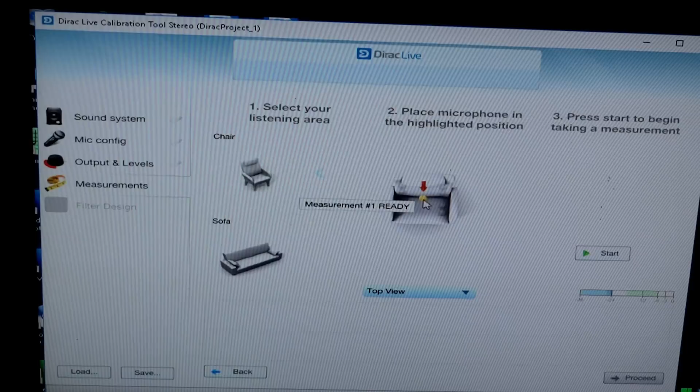So basically it's giving you like a measurement area around the chair, and the instructions say don't put all the measurements too tightly together, because Dirac Live will then filter too much. You want to give yourself a nice area. Now you don't just pick the area, obviously it tells you the measurement points, and you put the microphone basically where it tells you, and it's worth cross-referencing and making sure you take your time and do that bit correctly. There's no time limit. You literally get yourself ready and off you go.

So the first one I think is the most important. You need to make sure the first one is spot on in terms of being in the middle of the seat, being at the right distance, the right height, ear height as well. So if we quickly put that back to that view, it's right slap bang in the middle of the listening position. So that's what I've pre-done. I'm just going to check that, because best to check twice. It's normally measure twice, cut once, but for this it's check twice, measure once.

Okay then, so we're just about to run our first measurement, so be quiet, hold, make no noise. Okay then, first measurement taken, let's quickly check. So this measurement's going to be back against the chair, to the right hand side of the listening position. So I'm going to move over, move the microphone and run the next measurement.

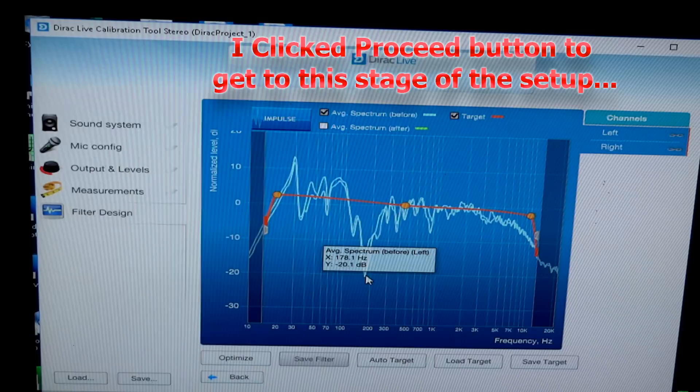Okay, so we've run our 9 measurements. Now this is my horrific in-room frequency response. And if you look at that, it's horrific. Look, it's minus 20 decibels there at 200 hertz, and plus 13 decibels there at 30 hertz. So we've actually got a 30 decibel difference in the bass in this room where I sit.

Now it's absolutely horrendous. However, if you look through the mid-range and treble, the treble tapers off early. That's a little bit of how I've got the speakers toed out. It's a kind of negative side effect of that, but it's very, very smooth. Mid-range and treble is extremely smooth. Now this is actually the magic of Dirac and what Dirac does.

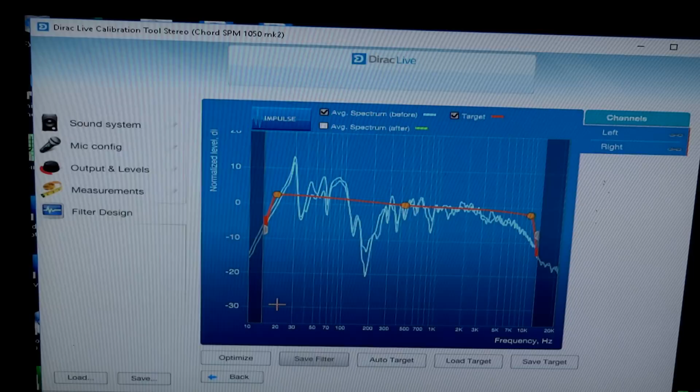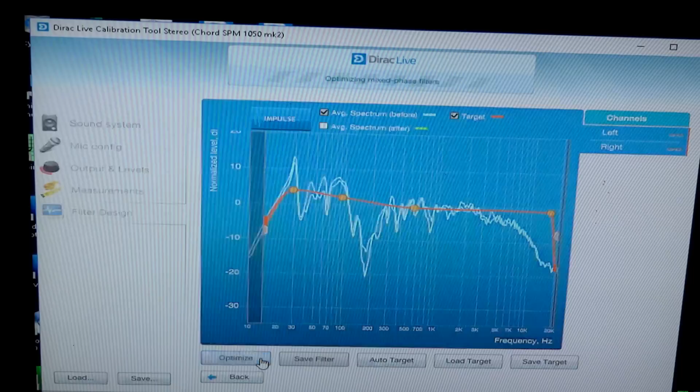So the first thing we want to do is save our measurements. As you can see, these are products that I've reviewed before: Luxman M700, Arcam P49. So I'm going to save this as SPM 1050 Mark II. So that's our measurements saved. So this is my pre-saved target curve. Now this is the magic of Dirac. Watch what it does. So hit optimize.

Boom. Fixed. Now obviously it can't fix the massive null that I've got here. However, it reduced it from minus 20 to minus 10 decibels. It gives you some idea of what Dirac does in terms of range. But look how it's balanced out all my mid-range and treble. Now I could toe my speakers in aggressively and bring this up naturally. However, having the speakers toed out gives me a very, very wide soundstage. In a narrow room, I really don't want to sacrifice that soundstage.

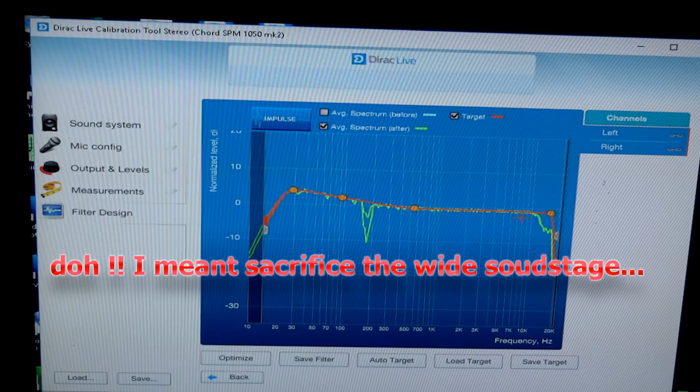So, by having Dirac, I'm able to get the sound that I want, the actual frequency response that I want from the system, but I can still have the speakers toed out how I want them. So, if you look at how it was before in blue, how it is after in green. Now this is obviously an average across all the different measurements, so it's an average across 9 measurements.

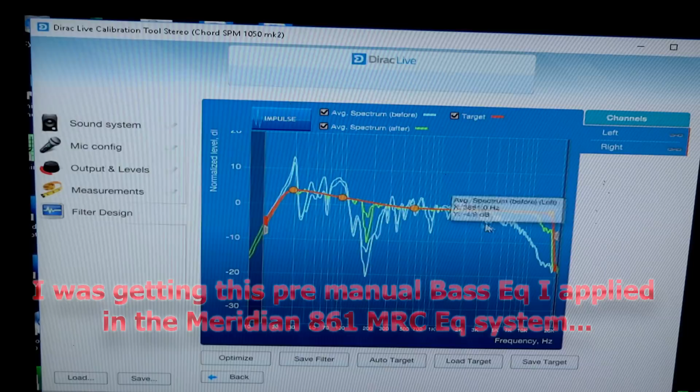So, look how tight it gets it. Look at how tight it gets it. And that is how it was before. So if you look at the blue, get the mouse out of the way, if you look at the blue, even with a lot of room treatment, even with a lot of time and effort, that is what I was getting, and that is unlistenable, really. Look at that massive variation.

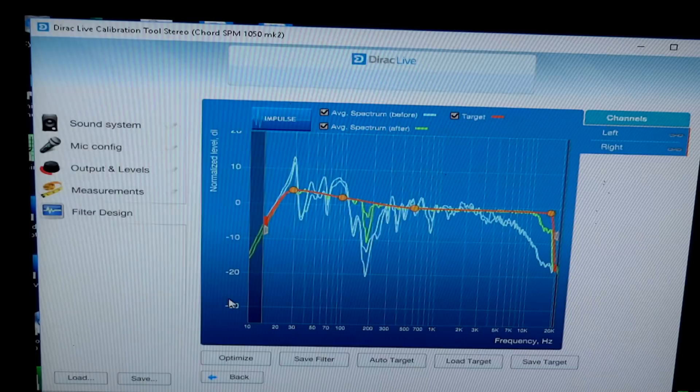I do have a bad room, but all rooms are bad. All rooms will have this kind of effect on your sound. So you need to do something. In my eyes, you need to do something. Room treatment's where you start, and this is, to be fair, like the icing on the cake.

So a quick look at the impulse response. If we look at the impulse response before, if we zoom in, you can see these speakers have like a negative impulse response, so it goes down before. I think that's to do with phase alignment. Then you can see all this here is all reflections.

Now I've got a lot of treatment in here, a hell of a lot, but all this here is all reflections, especially the early stuff. This is all reflected sound. Now if we come back out and look at the Dirac corrected impulse response, you can see how much tighter and how much cleaner it follows the line. And this is the important part here. So the initial impulse response now, boom, is fixed, and it tracks much better along the line.

Now the ideal impulse response would go along, up and down, and then flat out. So we're miles from perfect. However, these are KEF reference speakers. These are very high quality, good speakers, and yet we can see the impulse response I was getting. It's not actually that wonderful, really, when you think about it.

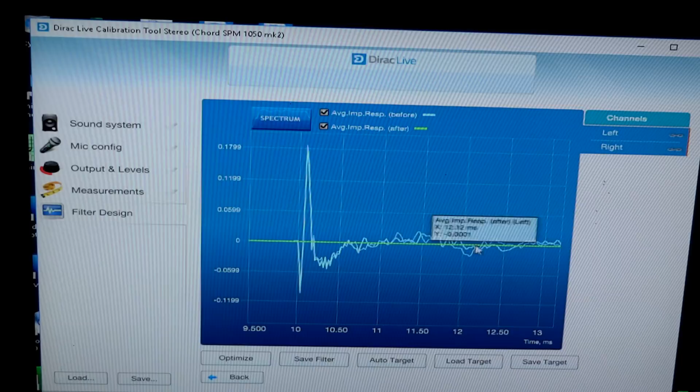So actually look at that for a second. So you've got the dip, the rise, another dip. Yep, look at that. Then we come out and we examine again. Zoom in close. So we've got the peak, the rise, and then we're back, both speakers back on the line. That is Dirac. That is obviously what it does.

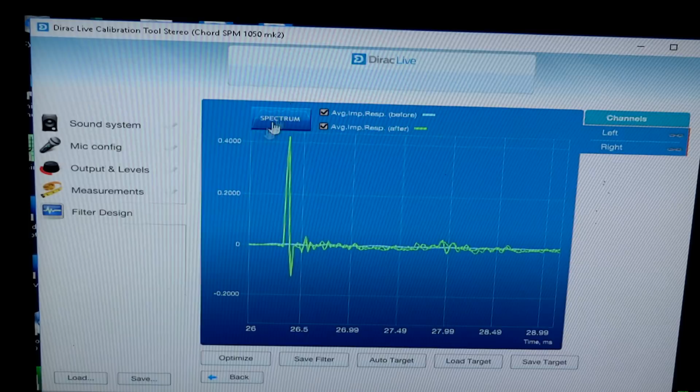So basically, I have a set target curve. So if we go back to spectrum, this curve, take away that. This curve that you're seeing is the set target curve that I use for everything. This is my set target curve. So every amplifier that comes in here, or things that we test, are going to go through the Dirac Live measurement process, and they're all going to be set to this exact curve.

Now, if you look at this exact curve, it means everything that we test is on an equal playing field. So we're not fighting against terrible room conditions. We've actually got very good room acoustic conditions, but the frequency response was still poor. So now we've got excellent frequency response, exactly how we want it. So every single piece of equipment that's tested in here is tested the same.

And when we do recordings, if you look at the recordings in the channel, every single recording is set with Dirac like this. It's set with this frequency response, this rise here, from about 700 rising to 30 hertz, at about 4 decibels, with a straight line hard knee. That's called a hard knee house curve.

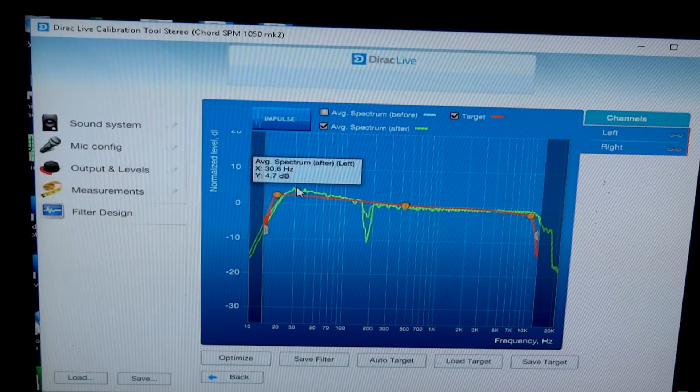So if we look at the Dirac stock curve, it's much leaner in the bass, and it rolls off a little bit earlier in the treble. So I haven't altered it much. The stock curve there is in orange. I personally prefer a little bit more extension, a little bit more linear through the upper mid range, and actually a bit more in the bass. But we're talking the difference of about 2 decibels at 30 hertz. So it's negligible, but personally that's my preference.

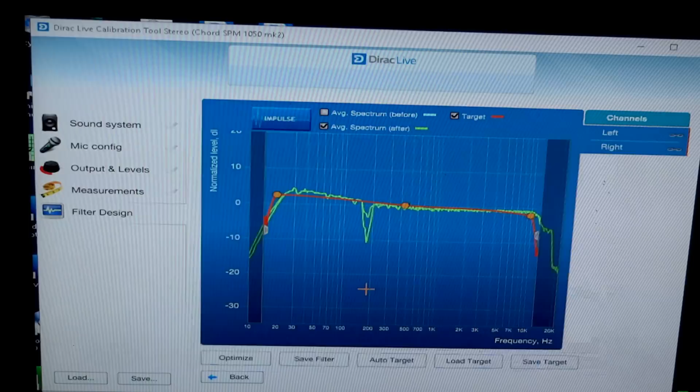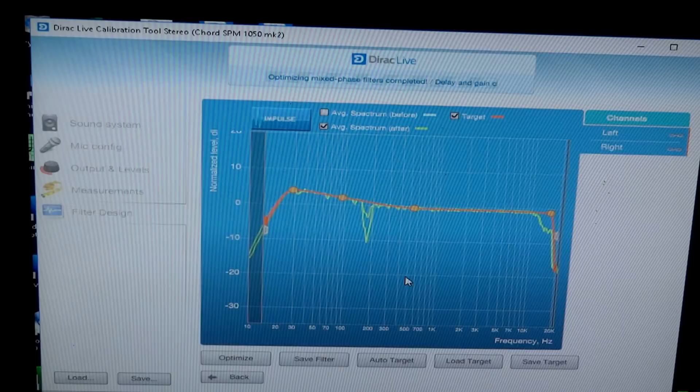So now we need to save our filter. So I need to actually put that back to how it was. We're going to quickly run that again. Okay then, so we're going to save the filter. Saved. Shut that down. Next we load up our Dirac audio processor.

Now this is where we choose certain things. The first thing we need to do, we need to load our set of measurements for, obviously, for Chord. Now please excuse my poor language, that is just my idea of a joke.

Right then, so this is something that's important. If we look, it will set an ever so slight delay on the speaker. It's set an ever so slight gain difference per speaker, and a slight delay. So I actually personally disable that and run it perfectly flat. To me, it always sounds best when I turn that off. So gain and delay, I actually disable.

Now, this isn't an AV system. I've set the levels with software, and I've used an SPL meter to set the levels per channel. So the differences are minimal. However, even though they are minimal, like 0.1 milliseconds or 0.1 decibels, they can actually skew a nice, full, central image. I've had it before where they skew the image off to the left and the right.